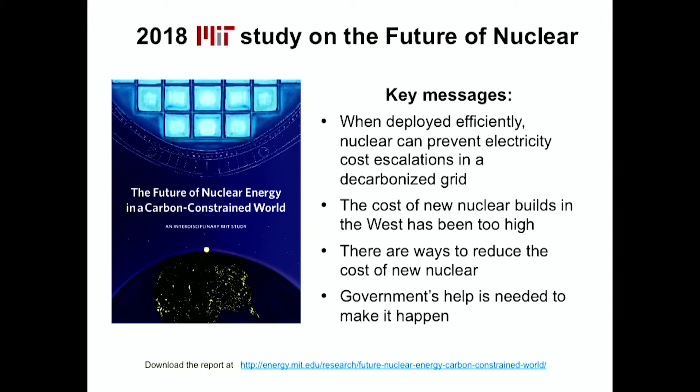The cover of the study is shown here, and if you have an interest in nuclear beyond today's webinar, I would encourage you to download the report. The key messages are also listed on this slide. I'm not going to go over this, but 2 out of 4 of these key messages will be echoed in today's presentation.

So before I jump into what these new nuclear technologies look like and what can they do for the energy infrastructure in the 21st century, let me just give a very brief recap of where nuclear is today. Focusing on emission-free or carbon-free electricity generation worldwide, nuclear is a very big contributor there. You can see in places like the US and Europe it is actually the largest generation technology of carbon-free electricity. In places like the Republic of Korea, the data are there because I gave a similar presentation over there recently. This fraction climbs up to almost 90%.

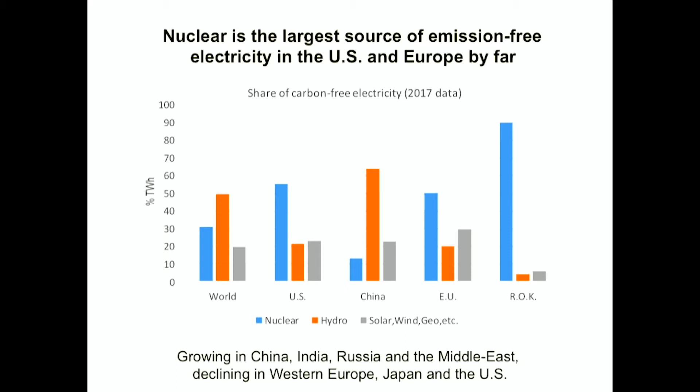Now, that's a snapshot of where nuclear is now. It is growing at good rates in China, India, Russia, and the Middle East. That means that there are ongoing construction projects for new nuclear power plants there, but it is declining in Western Europe, Japan, and the United States.

Now, looking ahead, an important question is, do we need nuclear to deeply decarbonize the power sector? The emphasis here is on the word deeply. If one starts with a fairly high carbon intensity power grid, which relies heavily on coal, it is fairly straightforward to reduce carbon emissions somewhat. If one switches from coal to natural gas, emissions are reduced. Bringing a little bit of renewable capacity online also reduces emissions.

But the emphasis here is on deep decarbonization. If we are to follow the recommendations of climate scientists who want to decarbonize aggressively the power sector and the economy overall, then the power sector has to decarbonize very, very deeply and aggressively between now and 2050. So in the study that I mentioned earlier, we found a fairly compelling economic argument in favor of keeping and growing the nuclear share of the power sector.

The punchline of that analysis is that excluding nuclear energy, which is carbon-free and dispatchable, from low-carbon scenarios can drive up the average cost of electricity.

Now let me walk you through the graph you see here. At MIT, we developed and validated a tool called GenX that simulates the optimal generation mix in power markets. You pick a region of the world, and for that region you need as input the hourly electricity demand, the hourly weather patterns—because that determines how much solar and wind you can get at any given time—the capital, operation, and maintenance fuel costs of power plants, including backup and storage, which you might need if you have a lot of solar and wind in your system, and finally ramp-up rates: how quickly a power generation asset can change its output to follow the load.

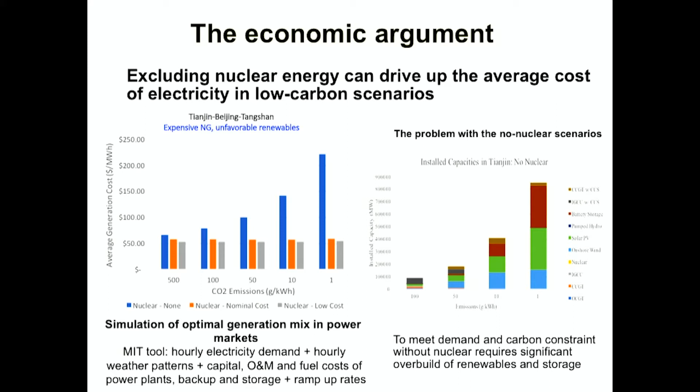Our analysis, which at this point has been repeated with different tools and different assumptions by other groups—not just at MIT but worldwide—shows that in many important regions of the world, having a carbon-free, dispatchable, or controllable energy source is important if you try to decarbonize and keep your average cost of electricity low. So we think new nuclear power plants should be built and be part of the future generation mix in the power sector.

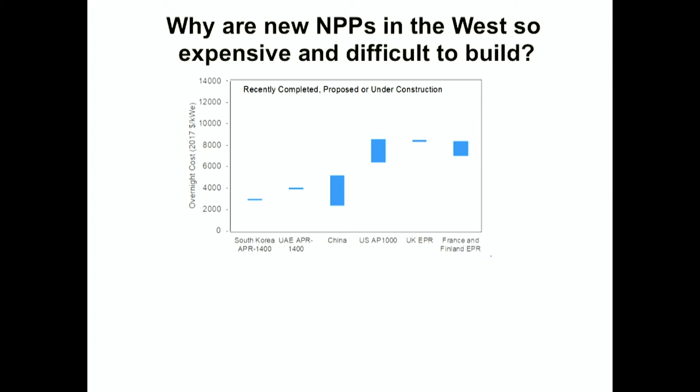But what about cost? We've all heard that in the West, in the US and Western Europe, some construction projects for new nuclear power plants have been very expensive, and that's certainly a correct statement. What's shown in this plot is the overnight construction cost, in dollars per kilowatt, so per installed capacity, for a set of recently completed, proposed, or under-construction nuclear power plants. You can basically see there are two groups here.

Let me move through the animation. The first group is the Asian projects. In Asia—whether South Korea, China, or even Japan before the accident 10 years ago, or the Emirates—the overnight construction cost for new nuclear power plants has been quite reasonable, on the order of $3,000 to $5,000 per kilowatt.

On the other end, if you look at the second group, essentially the US and Western Europe, you can see that the overnight construction cost is roughly a factor of two higher.

So in the study that I mentioned already a couple of times, we spent a lot of time and effort trying to understand why there is such a big difference in the construction cost and associated schedule delays between Asia and Europe. One might initially think that this has to do with the difference in technologies or different reactor designs being built. But that's absolutely not correct.

In fact, in all these instances, we're talking about large light water reactors, large meaning gigawatt scale. In some instances, we're talking about almost the exact design being built, for example, in the US and in China. And you still see a big cost differential.

So in digging deeper on this topic, we ended up interviewing managers for construction sites in Asia, the US, and Western Europe, and read the literature about mega projects and followed the news releases about the progress of these different programs. We basically learned that there is a set of attributes for projects in Asia that have not been reproduced in the US and Western Europe, and we think that's the main reason for the cost differences you see here.

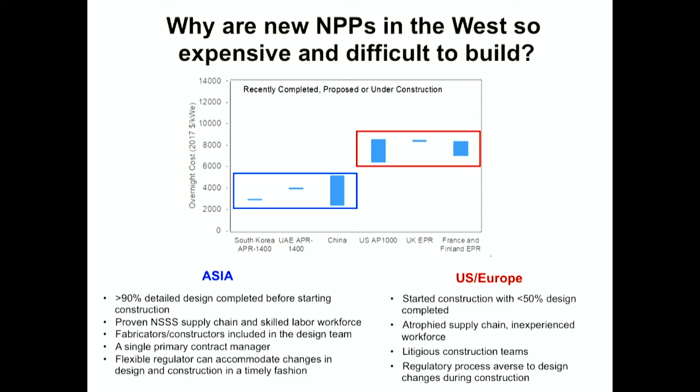We also found some important differences in the way the contracts were set up and the composition of the team. There are some aggravating factors that further explain or amplify the differences between the Western projects and the Asian projects.

The first is the productivity of the construction sector, not just for nuclear construction projects, but for construction in general. In the US in particular, and in the West in general, the productivity of the construction sector has been declining since the 1960s. That's surprising, but it's the fact.

By contrast, other sectors of the economy, for example manufacturing or agriculture, have seen their productivity increase quite rapidly over the decades. The potential implication of this for new nuclear is that you may want to shift more and more scope and labor from inefficient, non-productive construction sites to very productive and efficient environments such as factories and shipyards. But we'll talk a little bit more about that later on.

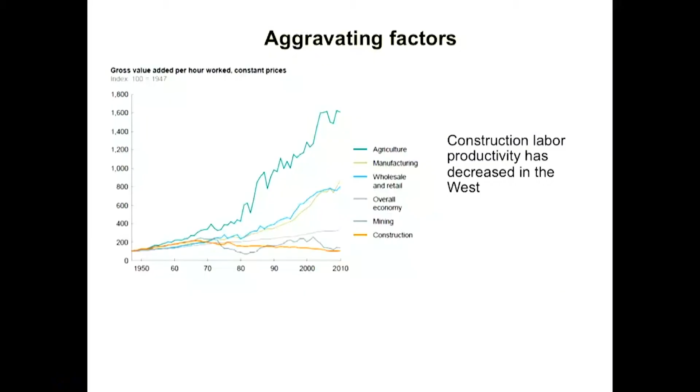The second aggravating factor for the differences we see between Asia and the West is wages and labor rates. Not surprisingly, in places like China, but even Korea, both for construction and engineering crafts, the wages tend to be significantly lower than in places like the US, the UK, and France.

In our study, we took a reference plant for which we had data in terms of the number of hours required to build or construct the different parts of the plant.

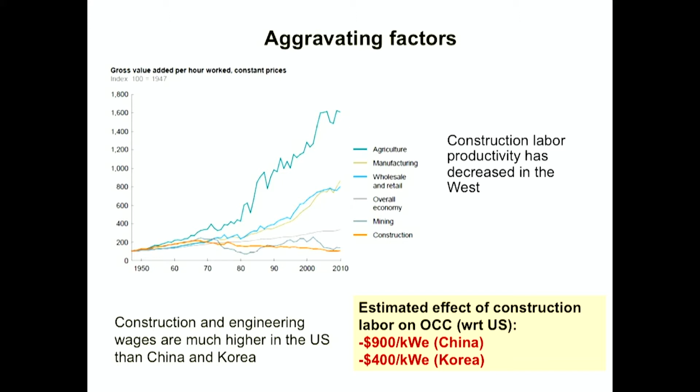When you roll up and multiply those hours times the labor rates, we found that the difference between China and the US in terms of overnight construction cost for China would be on the order of $900 per kilowatt, and for Korea about roughly half of that. So these are significant numbers. They don't explain the factor of two difference I showed in the previous slides, but they are aggravating factors. So where do we go from here?

If the West has lost its know-how to build nuclear power plants, there might be a role for advanced reactors in ways that I will explain now.

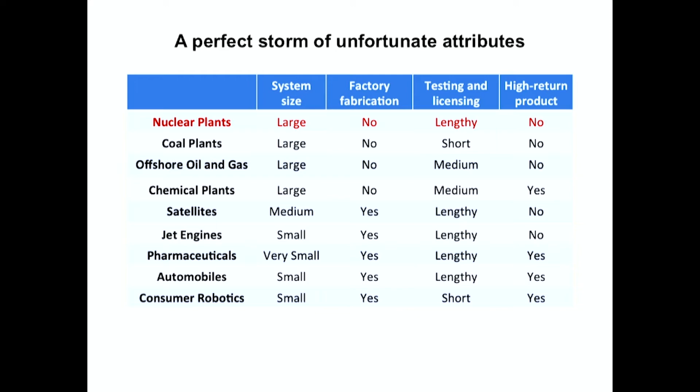And lastly, is the product that this industry produces a high return product or a commodity? In the case of nuclear, traditionally it has been electrons sold to an interconnected grid, which is obviously a commodity. In other cases—pharmaceuticals, automobiles, consumer robotics—there is certainly a premium associated with the product, and they're not commodities. So you see that nuclear is not unique in any one category, but it is the only industry that has negative attributes in all four categories.

So I call this the perfect storm of unfortunate attributes. The bottom line is that this has resulted in a very long, on the order of 20 years, and costly, on the order of $10 billion, innovation cycle for new nuclear technology. Just to be clear, what I mean by new nuclear technology is a new nuclear reactor design. It typically takes 20 years and $10 billion.

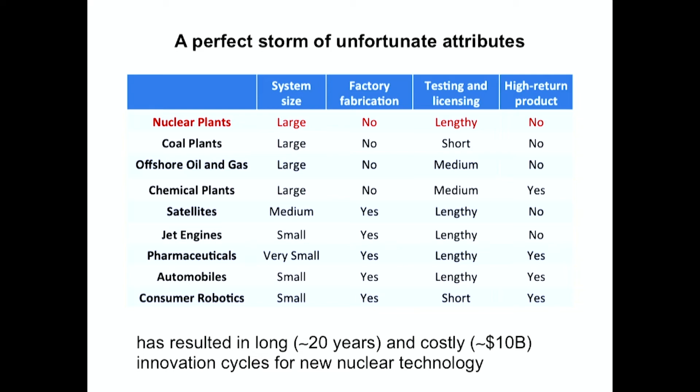Now, I don't need to explain that in today's environment, this time scale and magnitude of investment are completely unacceptable. So if this industry in places like the US and Western Europe is to have a future, the paradigm by which they develop, demonstrate, and deploy innovative nuclear systems has to shift radically.

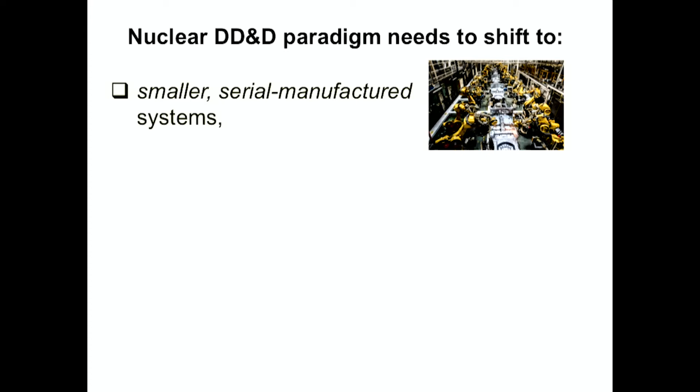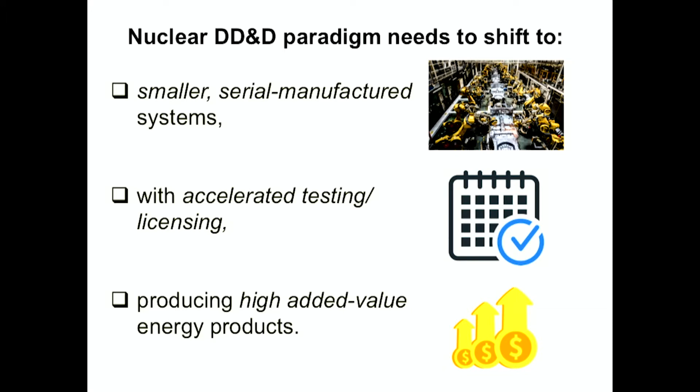First of all, it has to go to smaller, physically smaller, serial manufactured systems. I'll explain what I mean by all of this in the upcoming slides. The testing and licensing has to be much accelerated with respect to the past. And lastly, I believe the energy products produced by nuclear systems have to have some higher added value than just electrons pumped onto an interconnected grid. So let me now examine each of these propositions one at a time.

The first is smaller systems. I think the industry is getting this—there is a clear push in the US and Western Europe towards smaller reactors. An example is shown here: this is the GE General Electric BWRX-300, shown all the way to the right, compared to the previous generation GE product called the ESBWR.

That's a 1.6 gigawatt scale reactor compared to the BWRX-300, which is a 300 megawatt reactor. So not only is the power output lower, but in terms of physical size, as you can see in this graphic, the volume is reduced by 90%. What's more important is the reduction per unit of electricity generated, and there's over 50% reduction in building volume.

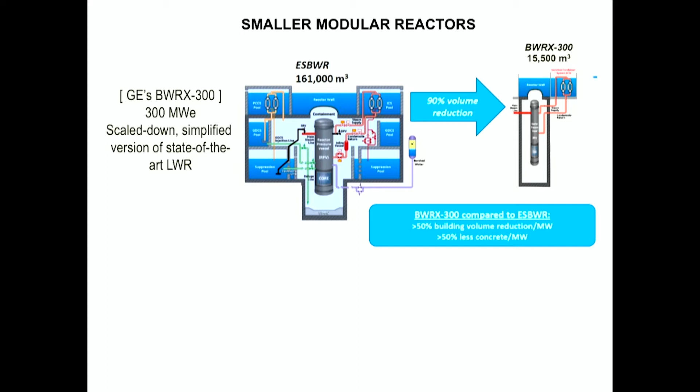Construction of buildings in a nuclear power plant costs a lot, and there's over 50% lower concrete use. At the same time, we're still talking about the same technology, so there's not a radical change in the materials or fuel types used. The components still look more or less the same, just shrunk down, with a lot of simplification in terms of elimination of components.

At 300 or 200 megawatts, that range is also an ideal size for replacing aging coal-fired or natural gas-fired plants when we decide to deeply decarbonize, while still being able to reuse existing infrastructure at the sites, like cooling, switchyards, and transmission lines. It can be deployed in smaller increments, and importantly, the magnitude of investment is now on the order of $1 billion as opposed to $10 billion, so in terms of overall financial risk, it's lower.

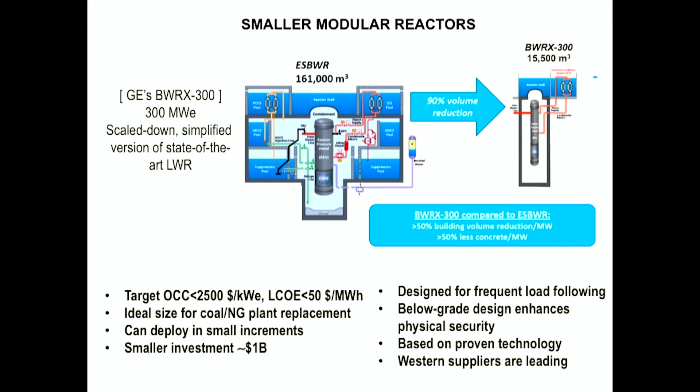These systems are designed from the outset for frequent load following, recognizing that they have to operate in an environment where not just demand fluctuates, but generation might fluctuate too. They tend to be located physically below grade, which enhances physical security, for example against airplane crashes. They're based on proven technologies, and the good news for the industry is that this push for small modular reactors is really led by Western suppliers, so it also becomes an opportunity for the industry in the West to regain the lead in nuclear technology.

What these small modular reactor approaches do, or might do, for cost is the following: the idea is that you deploy multiple standardized units, each identical to the other, at the same site. This has shown to be an effective way to reduce cost even for larger nuclear power plants. When you build them in series, particularly at the same site, the cost of the latter units is lower than the cost of the earlier units.

They also tend to use advanced concrete materials. Concrete is typically a big contributor to the overall cost of a new nuclear power plant—it requires a multi-step, labor-intensive process to erect a reinforced concrete structure. There are now materials used outside the nuclear industry that can be applied to new nuclear reactors to reduce the amount of labor required for those structures.

The modular construction itself—SMR stands for small modular reactor—the modularity here means both that you have identical small reactors, but also that large sections of the plant are now pre-assembled in factories and then transported to the site and connected, as opposed to being stick-built at the site itself.

Lastly, something we recommend in our study is to take a hard look at seismic isolation, because a lot of what becomes site-dependent in new nuclear power plant design is associated with the requirement to withstand a large earthquake. If you put your plant on seismic isolators, those requirements are a lot less severe, and you can come up with a standardized design that will work everywhere.

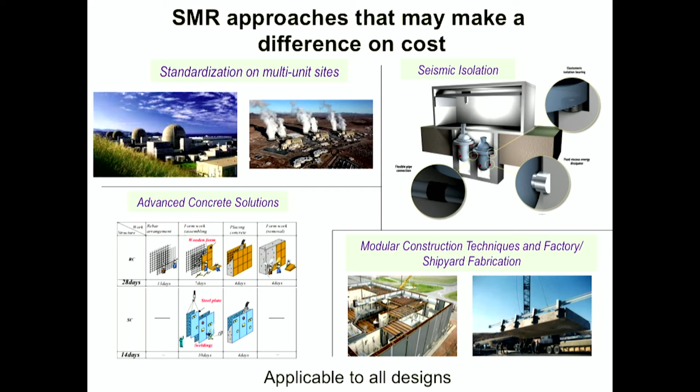With these innovations, it should be possible to shift labor from site to factories. That in turn should reduce installation costs, standardize the design to reduce licensing and engineering costs, maximize learning, and shorten construction schedules, which reduces interest during construction.

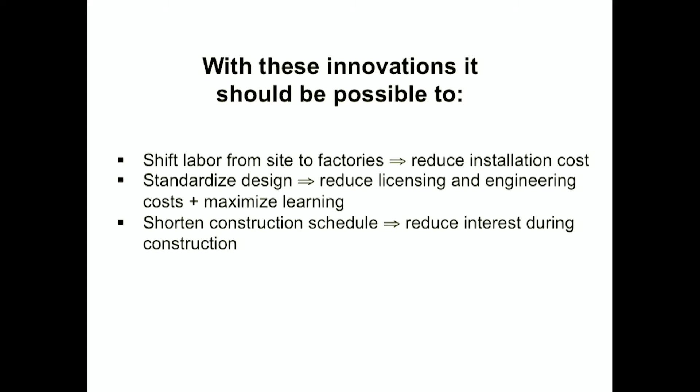There are several industries where these approaches have been implemented, including an example in the nuclear industry. In Japan, the ABWR series of reactors had a large scope of modular construction, resulting in about a 20% reduction in cost and schedule.

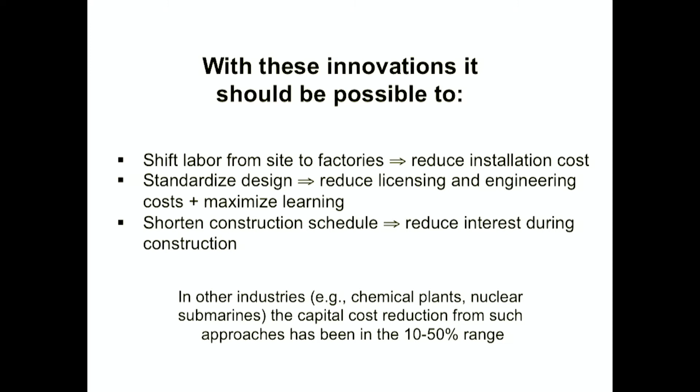But in other industries, it's been, in some instances, transformational, with a reduction in capital cost and schedule of the order of up to 50%, things like chemical plants and nuclear submarines even.

Now, if you take this idea of a smaller concept or smaller nuclear reactor to an extreme, you can actually arrive at what I've been calling a nuclear battery. It's shown here. The idea is a very, very small nuclear fission reactor of the order of 1 to 20 megawatts. You can see the physical scale is such that this system would fit within a standard shipping container. It is coupled to a power conversion unit, either a Stirling engine or an air Brayton cycle.

It features a block core made of steel or other compatible material with heat pipes, so there are no moving parts. The energy generated by fission in the core is removed by heat pipes, taken to the power conversion unit, and that's where the electricity is made.

It would be self-regulating. This has actually been demonstrated in similarly small reactors. It would be an entirely standardized design, built in a factory, put in a standard shipping container, and arrive to the site, whatever the application. The idea is to have plug-and-play operations, possibly autonomous or semi-autonomous operation, and no on-site refueling for 3 to 5 years. Once the reactor fuel runs out, so to speak, the old battery, the nuclear battery, is basically shipped back to a centralized facility and refueled there.

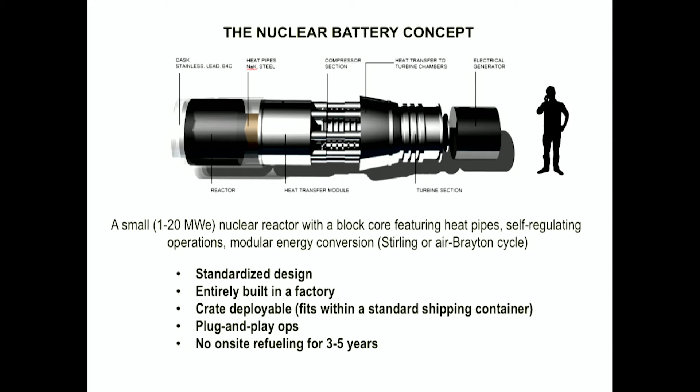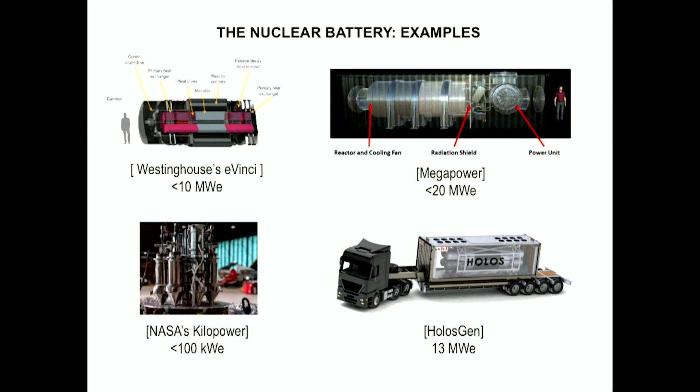Examples of these nuclear batteries are the Westinghouse eVinci concept, which is being developed by Westinghouse. It's been under development for a couple of years, and it's less than 10 megawatts. You have Megapower, a project that originated at Los Alamos. HolosGen is a smaller company, and for niche applications like space, NASA has also developed a nuclear battery at less than 100 kilowatts. All these systems share an exceptionally robust safety profile, which, in my opinion, will be able to accelerate their testing and licensing dramatically.

Let me walk you through this briefly. In all these designs, you do not need emergency AC power to cope with abnormal situations. You don't need external energy sources to actuate or drive your pumps or safety systems and so on. The system does not need any external intervention, either by the operator or by engineered systems. It is very, very simple. I mentioned no moving parts, fewer components, so they tend to be a very simplified design, and that also simplifies operations—the number of things people have to pay attention to during operation.

Last but not least, because of the fuel forms and the way the system responds to an abnormal event, the emergency planning zone—essentially the zone that could be affected during an accident—is limited to the site boundary. So there would be no need for any evacuation or routine training of the local population. These attributes have not only been demonstrated but also put to good use in the demonstration of one of the concepts I mentioned in the previous slide.

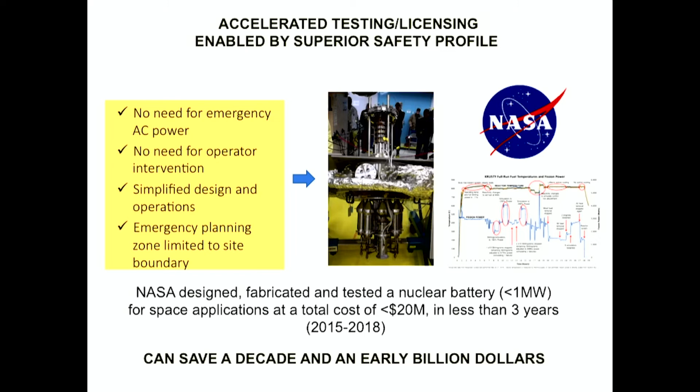That's why there is a lot of excitement about these nuclear batteries now. The third item is, how do I add value? How do I decommoditize energy products that are produced by nuclear systems?

There are two ways of doing that. The first is, frankly, completely out of our control: a strong policy from governments, policymakers that recognize the non-emitting nature of nuclear electricity, the fact that it has a positive impact on the local economy, contribution to energy security, et cetera. Of course, that would add value to electrons on the grid, electrons generated by nuclear plants.

The other way is to capture new markets in which your product is not a commodity but is valued with a higher value. This could be heat, hydrogen, production of synthetic fuels, water desalination, remote communities, mining operations, propulsion. In many such applications, you're competing against expensive and polluting fossil fuels like diesel generators, so it becomes easier to show the value of your product.

So this is the last part of the presentation. I'm going to go over several applications in which I believe these nuclear batteries in particular can provide value that is needed and desirable.

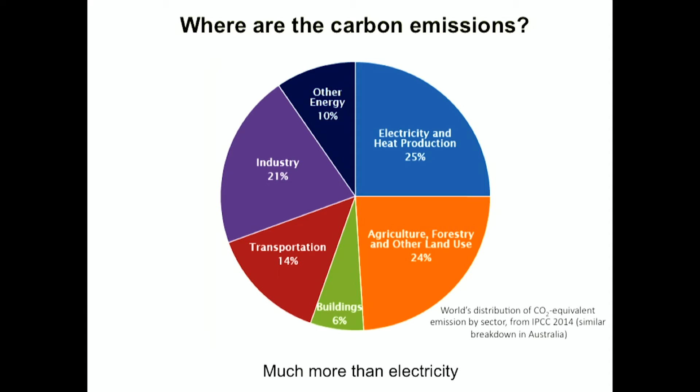The premise of this is that it's not all about the power grid and it's not all about electricity. If you look at total carbon emissions worldwide, only about 1/4 are associated with electricity production. About the other 3/4 are in sectors like transportation, industry, buildings, and agriculture. So if we're serious about decarbonizing the global economy, we need to tackle not just the power grid, but all these different sectors.

You could, in principle, even use solar PV - you get electricity, you turn it into heat. Of course it's not very efficient thermodynamically, but it's possible. Or you could use solar thermal tower with storage. You could do the same trick with wind, get electricity and turn it into heat. You could use nuclear or you can use natural gas.

Right now in the US, we're using natural gas because it's the lowest cost, and if there's not a carbon constraint, you'd probably continue to use natural gas. But if you take natural gas out because we dislike the CO2 pumped into the atmosphere when you burn it, then you're left with the other options.

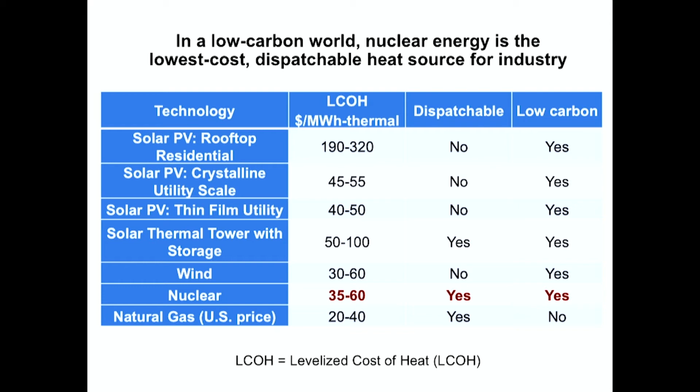We went a little deeper on this and looked at the U.S. market in particular. We went to the EPA database, which reports all industrial sites in the United States emitting 25,000 tons of CO2 per year or more. We only consider sites that need at least 150 megawatts of heat - the ones that require a lot of heat. We assume nuclear heat can be delivered at a maximum of 650 degrees C.

This is possible with current technologies called the high-temperature gas reactor, or even one such nuclear battery can do it. We consider all sorts of chemicals and other materials and processes that could accept that heat.

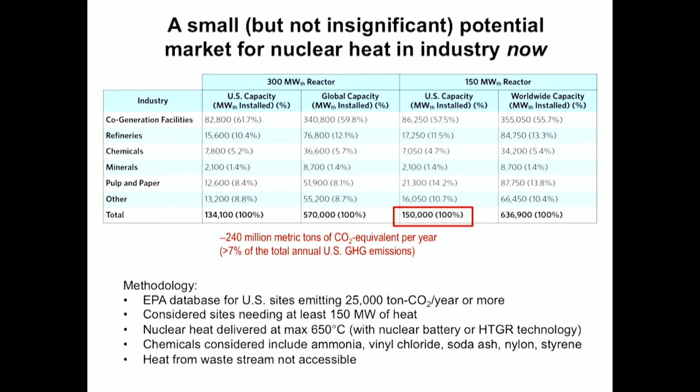When you run these filters through the EPA database, we came to the conclusion that you could basically replace 150,000 megawatt equivalent of natural gas with nuclear heat in the United States. That alone would displace on the order of 240 million metric tons of CO2 equivalent per year, about 7% of total annual greenhouse gas emissions. That would be a very good contribution, and it would also be a large business opportunity for nuclear.

The other sector we looked at, sort of top-down, big picture, is transportation. In the transportation sector, you can either electrify - go from internal combustion engine to electric vehicles - or you can go with fuel cell vehicles.

In that case, you need hydrogen. In the first case, obviously, you just need electricity.

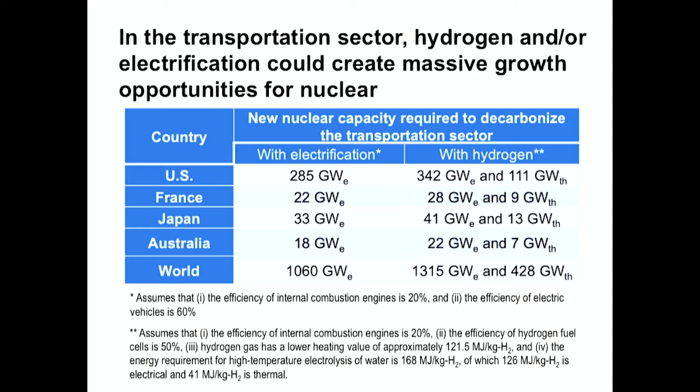For the world, it's about 1,000 gigawatts. Now, if you do it with hydrogen—and here we assumed hydrogen would be produced with high temperature electrolysis, so you need both heat to raise the temperature of water before you crack it, and electricity in the electrolyzer to crack H2O into H2 and O2—the numbers become even bigger. So again, big business opportunities.

There are also applications that don't fall under transportation or industry. One such application would be agriculture. Another one could be production of medicines and so on.

The very last part of the presentation focuses on what I've been calling co-located supply and demand. What is meant here is physical collocation of energy generators, like a nuclear battery, with the end users—the demand, the application this energy is used for. If you think about history, co-located supply and demand has always been used, because it's always been the most efficient approach. You can go back to pre-industrial revolution times, water mills for production of flour and olive oil—that's an example of co-located supply and demand.

But even closer to modern days, at the start of the industrial revolution, was the co-location of hydroelectricity with textile factories, and we have some examples here in Massachusetts of towns that really were born out of that collocation.

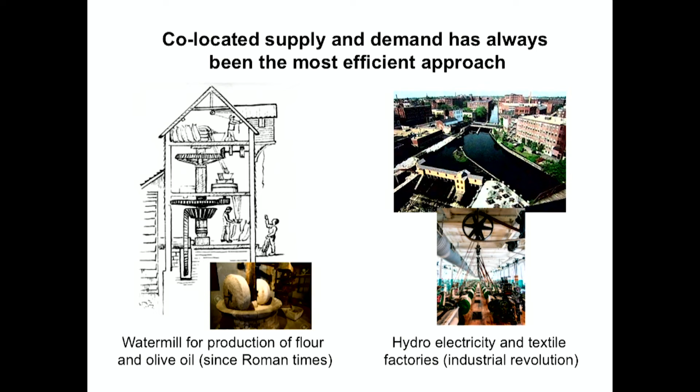Now, in the 21st century, co-located supply and demand could look very different. The supply could basically be a nuclear battery of the type I've shown a minute ago. And the demand could be a number of production and processing technologies that are off the grid, mobile, containerized, but not necessarily mobile and containerized—things like containerized agriculture or aquaculture, pharmaceuticals, 3D printing, data centers.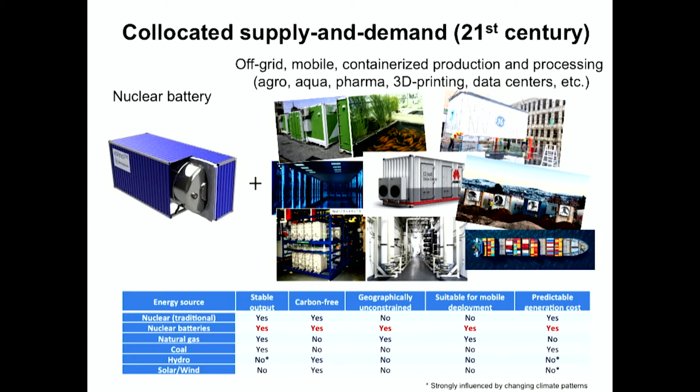So I went through what the options are: you have nuclear traditional, say a large nuclear power plant, or nuclear batteries of the type we discussed, natural gas, coal, hydro, solar, and wind. In my opinion, if you run through these five categories, the only technology that can really check all the boxes positively is the nuclear battery. I would submit that it is almost the ideal energy source for a lot of these applications.

Let me walk you through briefly some of these collocated supply and demand applications. The first is agriculture. There are several products like Freight Farms and Growtainer by Philips that you can go online and find out about. Essentially they are standard shipping containers, that's the size, within which you create a controlled environment, controlled in terms of temperature, light, and humidity, and you can grow whatever you want.

Obviously you wouldn't grow commodity produce that you can grow much more efficiently in fields. But if you start with high margin produce, like romaine hearts, saffron, or abalone—which of course is not a plant—morel, and truffles, then the ability to produce them in these containerized mini farms is actually economically quite attractive over a broad range of electricity costs. All that's required really in this case is electricity.

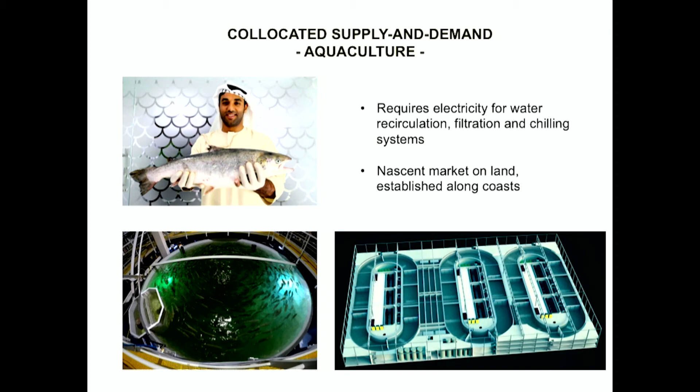Aquaculture - the picture shown here is from the Emirates. The Emirates are now close to being self-sufficient in terms of fresh salmon production. They don't import it; they actually produce it in their own country. If you think about the Emirates, the last fish you'd think could thrive there is salmon, but obviously it's done indoor in a facility with a controlled environment, in this case temperature, and it requires electricity for water circulation and filtration. It's a nascent market on land, and aquaculture is established along the coast, but there the need for electricity is not as obvious.

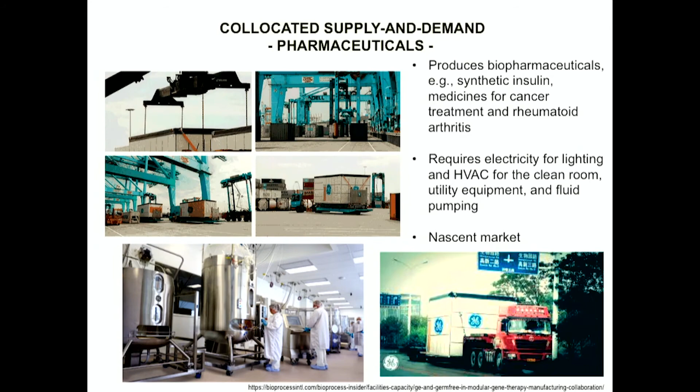Number 3, production of pharmaceuticals. Local production of pharmaceuticals - GE offers a product called KUBio. It's essentially a modular factory for producing things like synthetic insulin or medicine for cancer treatment and rheumatoid arthritis, among others. As a mini factory, it requires electricity for lighting, heating, ventilation, and air conditioning, for the clean room, utility equipment, and fluid pumping. It is a nascent market.

Advanced manufacturing - again GE here, the M-Line, or Autodesk, a different manufacturer. Mini factories that you can put next to customers, which basically have large 3D printers, and they can produce high added value components for industry. Once again, they require electricity for large 3D printing machines and for instrumentation and control, and obviously also raw materials for the components.

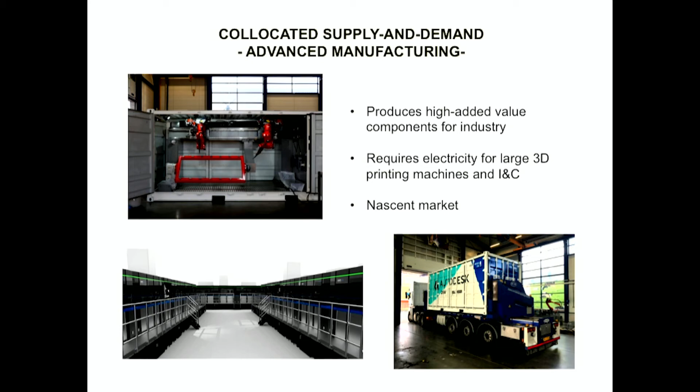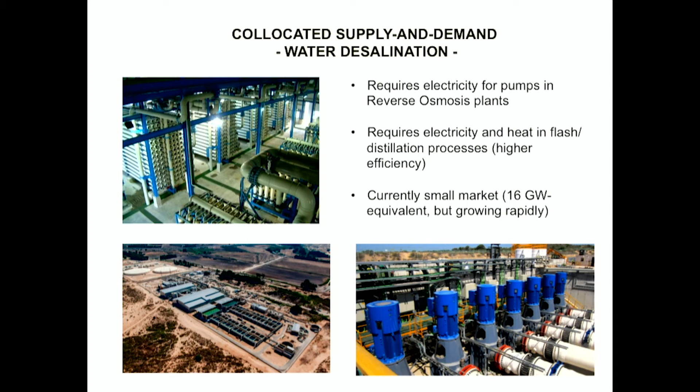Water desalination is a total no-brainer in the reverse osmosis version - it's highly modularized and requires just electricity. If you want a higher efficiency process, you're probably going to need a combination of electricity and heat, again something a nuclear battery would be able to give you. Currently the market for desalinated water worldwide is fairly small, 16 gigawatt equivalent, but it's growing very rapidly, and for some countries it's actually the only source of fresh water they can have.

This is a real interesting process developed by the Office of Naval Research for synthetic fuels. It's literally electricity plus seawater equals diesel fuel or jet fuel, whatever hydrocarbon you want. Sounds like magic, but it's not - there is CO2 dissolved in seawater. This process, which is an electrochemical, electrocatalytic process, essentially removes CO2, separates it from water, then cracks water, combines hydrogen with CO2, and then through a Fischer-Tropsch process you get whatever hydrocarbon you want. It's interesting that about 60 to 80% of the electricity input, which is the only energy input required, actually shows up as energy content of the final fuel, so it tends to be quite efficient.

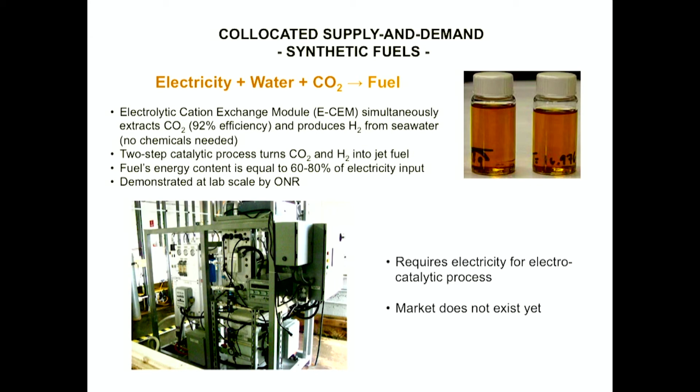Cost-wise, there are some estimates of maybe $6 per gallon of diesel, so it's not obviously directly competitive with fossil-based fuel, but in a carbon-constrained world, and for some applications, they might be interesting.

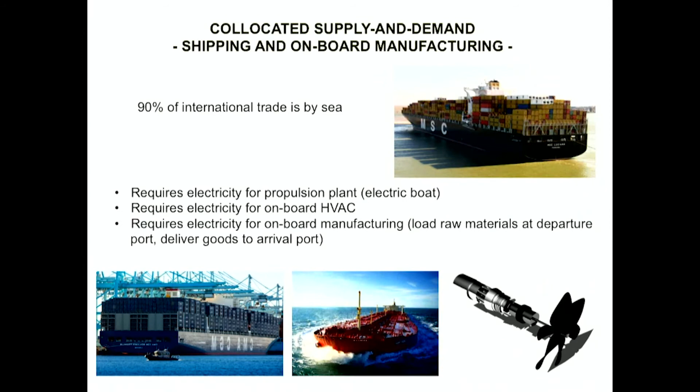Shipping and onboard manufacturing - about 90% of international trade is by sea. These nuclear batteries could be used for propulsion, not very different from what is already done in nuclear submarines and aircraft carriers by some navies. But you can go even a step further - you can have entire production lines on board, load raw materials at the departure port, make your products en route, and deliver the finished products at the arrival port. What's required there is electricity for the production lines, for HVAC, and for 3D printers, whatever it is you're using. So that could serve as well.

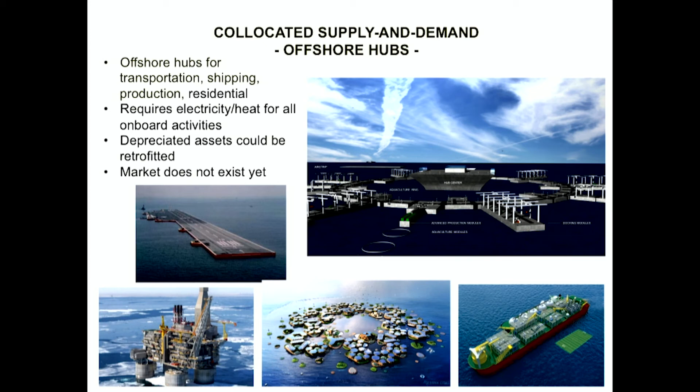The last application I'm going to mention is offshore hubs. Again, a little visionary here, but there are already some offshore facilities that require a lot of power and currently burn natural gas to get that power - for example, oil and gas rigs, or even some airstrips located offshore. In the future, we could also envision entire residential areas or maybe some industrial areas that will be somewhat offshore, and again this would couple quite well with nuclear batteries.

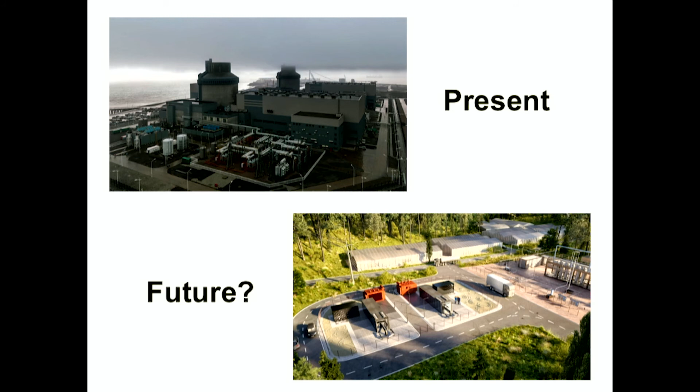So there is, as I mentioned, a lot of interest in small modular reactors and nuclear batteries. The drawing you see here at the bottom is our own rendering of what a site with nuclear batteries might look like. The battery you don't actually see there, it would be below grade. The parallelepipeds, those boxes you see, are basically the power conversion unit and then the transformer. So maybe that's what the future will look like, and we shall see.